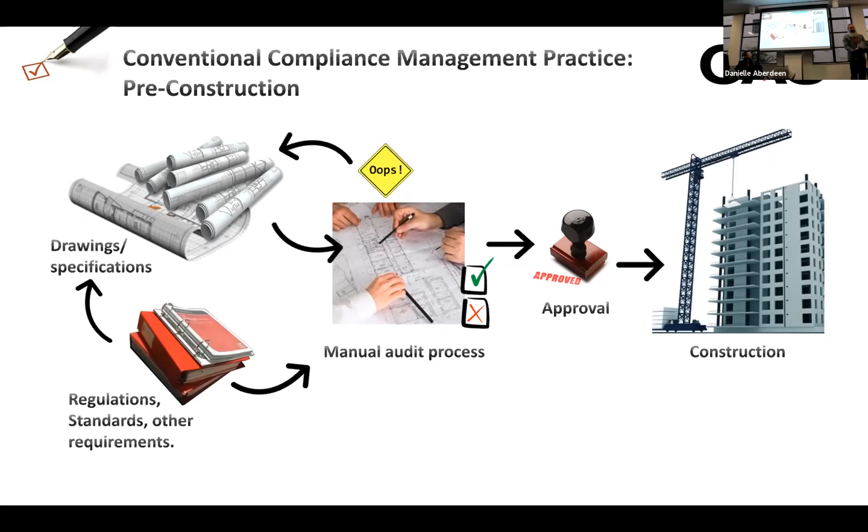And the approach that we have here is saying, well, what are computers good for? Computers are good for doing the simple, repetitive things that humans are really not very good for. Currently, they're not very good at doing the complex calculations and applying expert knowledge to do assessments. So can we have a partnership between the human experts and the computer to be able to more accurately and quickly check the codes and standards against the building designs which go in?

This checking happens not just at design, it happens all the way through the process. So as you're constructing, as you're looking at retrofit, as you're looking at demolition, there are compliance issues that impact on the building that have to be checked, that have to be ascertained. And as Johannes will show, the solution that we're developing will check compliance against the building at all stages of the life cycle. We'll focus more on the design aspects, but the ACABIM solution is there for all compliance checking across the life cycle of the building.

So some of the issues that we see and that we're facing. If we want to computerize this, well, we need regulations which are computerized. They don't exist. Our regulations are written for human interpretation and human understanding. And there's quite a difference between what we're capable of doing as humans and what computers are capable of doing. So if we want to be able to computerize any aspects of this, then the regulations have to be turned into a computable form. And there's quite a gap between the written version and a computerized version. So how we make that change happen and ensure that they're correct is an issue if we want to move into automated code checking.

I mentioned that the humans are doing very simple tasks often. A room like this, occupancy level over 30, does the door swing outwards? You have to check that for every single room in this building where the occupancy is great enough that the door should swing outwards. And so you have expert engineers who are going through the plans running these very simple checks, trying to identify every room which has a particular occupancy level, checking what type of door is there and which way the swing is on that door. And this is something that humans are likely to get wrong. They might not find every single room which has the right occupancy level looking through all of the paper designs. And so they may miss some of these things.

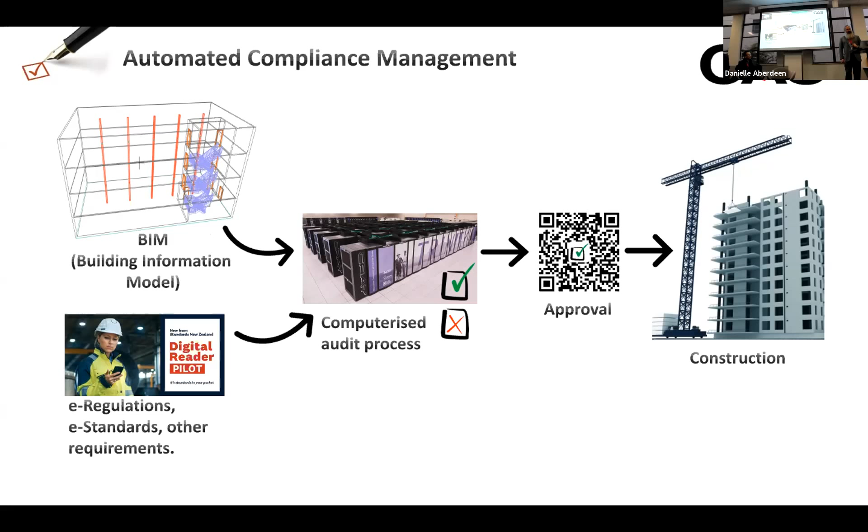So as I said, there's a lot that we need to make this really viable inside the country. So the 43 technical clauses from the building code, up to 500 normative references from standards, not just New Zealand ones, but ISO, ANSI, and the Australian standards, all which are referenced, that we need to be able to have access to be able to do some of the calculations that we're doing.

Working with the council, we've done a lot of work with the Christchurch City Council. They've identified 15 to 20 of the codes and standards which they think are their priority for doing the checks. The majority of checks that they do on a building come from these 15 to 20 codes and standards. And so we've been trying to match that in terms of making electronic versions of those particular codes and standards, that we can demonstrate where the benefit is in applying this approach.

Talking about the Standards New Zealand value add program. So this has been really useful for us that we can get access to these codes and standards. So the codes the MBIE has made available, and the standards, we have to be able to incorporate those into ACABIM. We've joined up with the value add program to get access to those particular standards, and so computerizing those to put them into the ACABIM system.

As I said, it takes a day a page. That's going to be millions of dollars worth of translation to try and get the New Zealand codes and standards into a computerized form. And we're sure that by the time we've done that, they'll change because they're always changing. And so once we've done our $6 million worth of work to translate everything into electronic form, we have to go back again and redo all of those codes and standards which have been updated in the meantime. Even the 15 that we've done now, 3 of them have changed since we've translated them. So we know this is going to be an ongoing process.

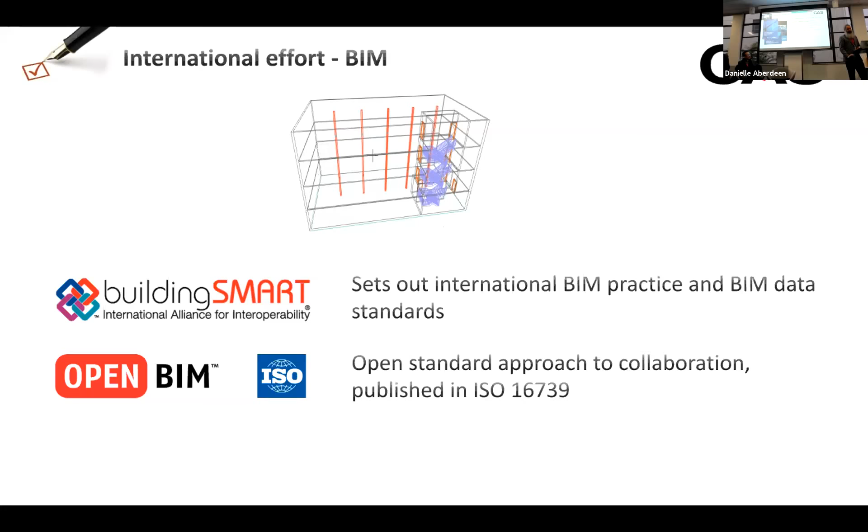And we know in New Zealand that this is now possible. Over 60% of projects in New Zealand are using BIM in some form. So BIM models are available for the majority of buildings being designed at this point in time.

And so the councils are starting to think about what they can do with these models, how they position themselves in the future so they can work smarter and faster with these models that might be available, rather than e-paper, which is what we're working on now.

Looking at the benefits, the BIM Acceleration Committee in New Zealand has identified a large number of benefits from BIM, and the uptake of BIM is accelerating over the years, an 8% increase year on year, which is pretty good. It's projected to be a $1 billion market in Australasia by 2024, so it's a pretty serious market developing around these BIM models.

As I said, for ACABIM we're talking human-guided automation. We know we can't do everything. It's performance-based codes in New Zealand, and the performance aspects are really hard for computers to work with. The acceptable solutions are much easier. Computers really like it when you tell them what to do exactly.

And we can transform much of the acceptable solutions into a computation. The performance-based aspects are harder - that's where we see the need for the experts.

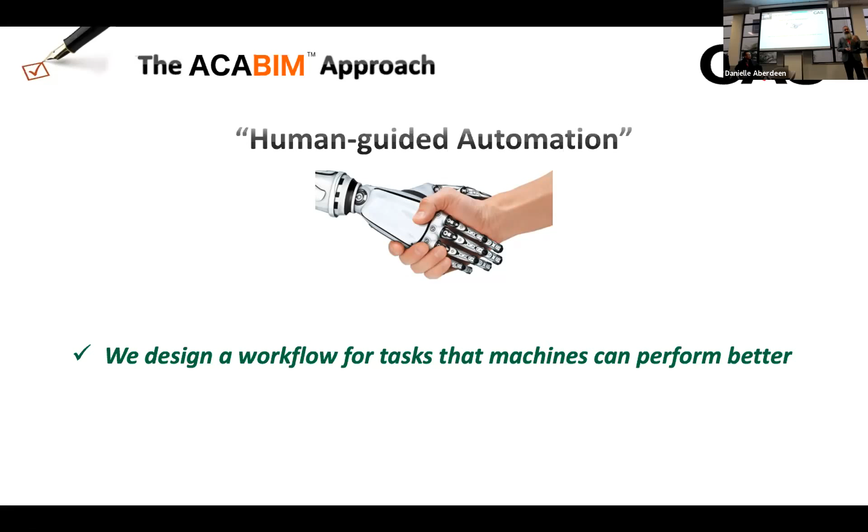So for the bits that computers can do best, we'll do that. For the bits humans can do best, we'll let the humans work on that.

As I said at the start, there's a whole range of processes where compliance is important, and ACABIM is looking right at that life cycle. As Johannes will show you in his demonstration, we have solutions which target many parts of this life cycle, doing audits against the needs of each of those different parts of the life cycle.

So we'll move very quickly into the demonstration that Johannes will give.

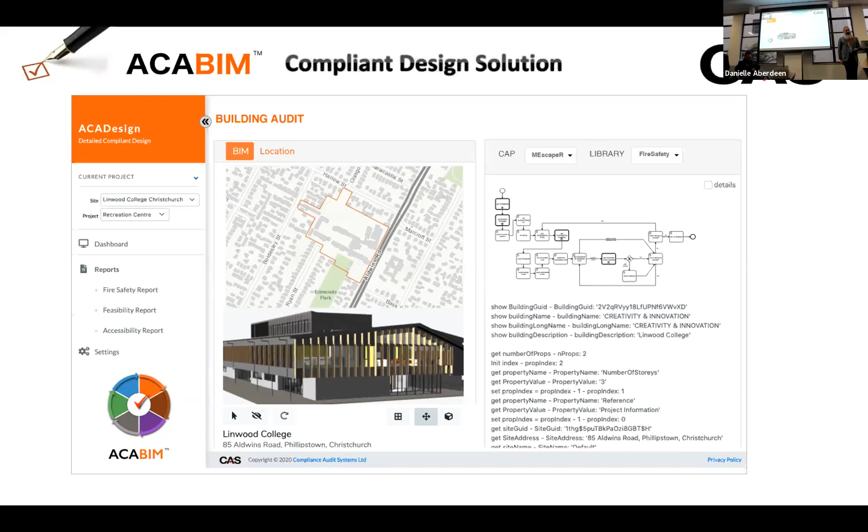So we can see large buildings, we can associate the land parcels for those buildings. This is the process equivalent of what the council would do to do a particular check against the code. This is pretty much the engine of ACABIM. So this process enactment, which takes the right bits of information from the BIM model, the right clauses from the regulations, puts those together and does the right calculations on them to give us a result which says how compliant it is. Working with Christchurch City Council, we've been able to show that we can generate reports very much the same as the reports that they would put out when they're doing code compliance checking for a building.

We find more things than they do. Computers are a little bit silly. If the tread riser is a millimetre off, it'll tell you it's a millimetre off, and a human expert wouldn't really worry about that. So we know, we're very exact. We have to build in a bit more human expertise into the assessment that we're making, so that we allow some of the things that would normally be allowed by a human, even though by the standard it's not exactly correct. But we generate reports so that people can see where the issues are with the system.

So I'll hand back to Johannes and he can show you what it looks like. Thank you, Robert.

Right. So here's a sneak preview of ACABIM. It has 6 solutions for its phases of the project lifecycle: planning, design, construction, operation, the retrofit.

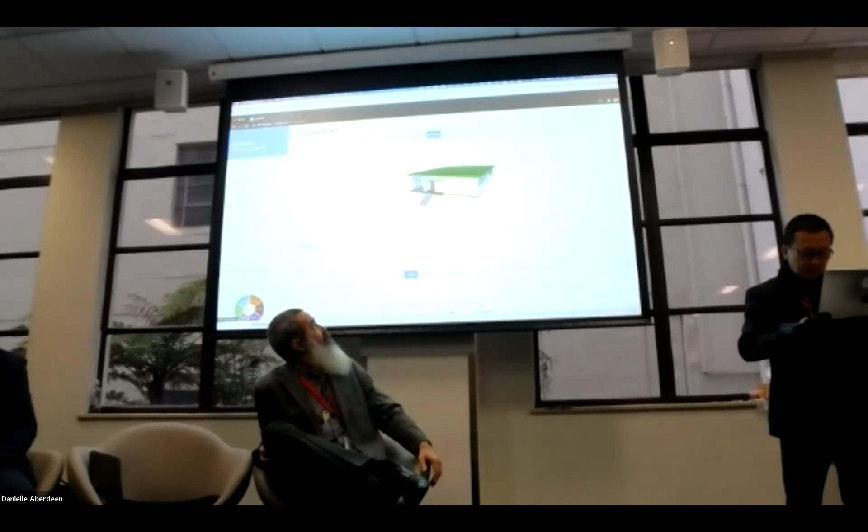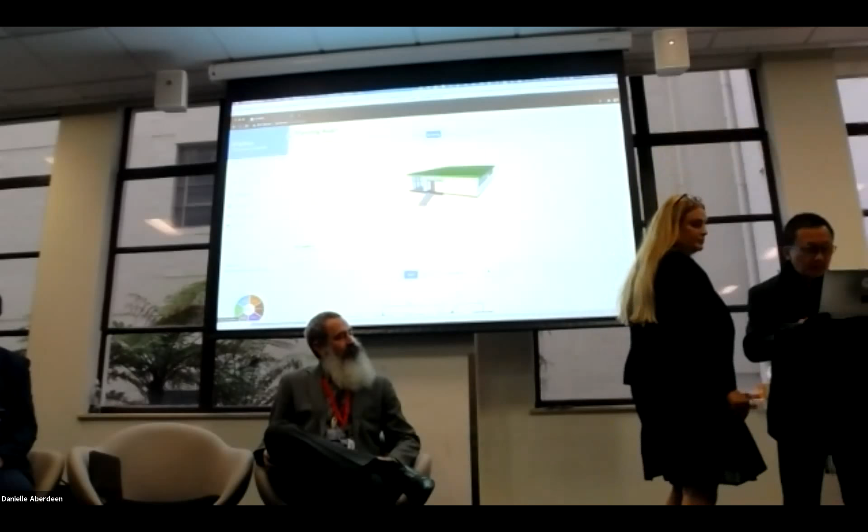Excuse me, sorry, could you just share your screen with the online audience? Right, sorry about that. Yeah, quickly do a quick recap. Yeah, I could go back. Cheers, another one. Let's start again, share screen. Okay, right. No, it's this one. Yeah. Oops, another one. Sorry about that. It's okay. Okay, yeah, perfect, all right.

So let's quickly recap. This is ACABIM, 6 solutions for different aspects of a project lifecycle: planning, design, construction, operation, and retrofit. Let's look at ACALand to start with.

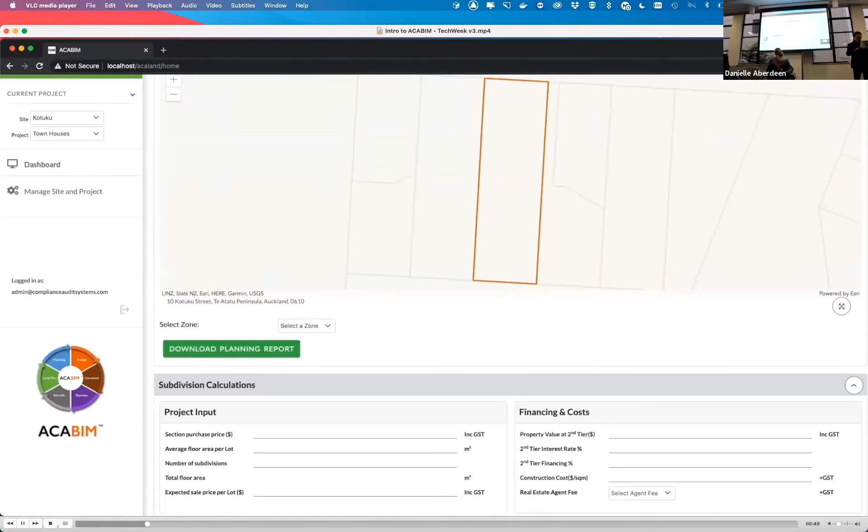Here you can select a site and a project, and you can look at the land information and property information that we draw from LINZ and other data sources. You can also query planning rules that have been pre-translated, depending on what you want to look at, in this case such as the maximum parking rate for this site. We can also look at optimizing your site development based on financial model as well as planning rules.

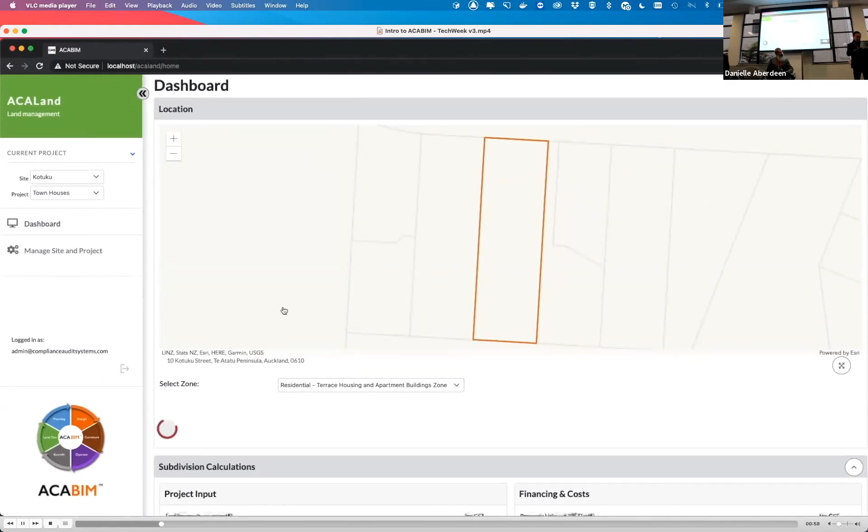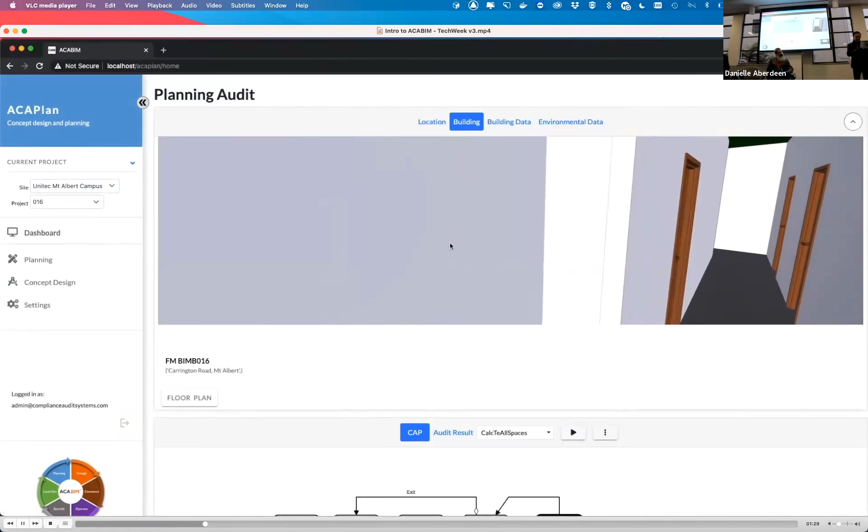Now, Land goes on to Plan, where you can assess your concept design for more planning compliance assessment. You can look at various aspects of the model and various information from the BIM model, the land parcel information, and also generate a planning report depending on the aspect of the checking.

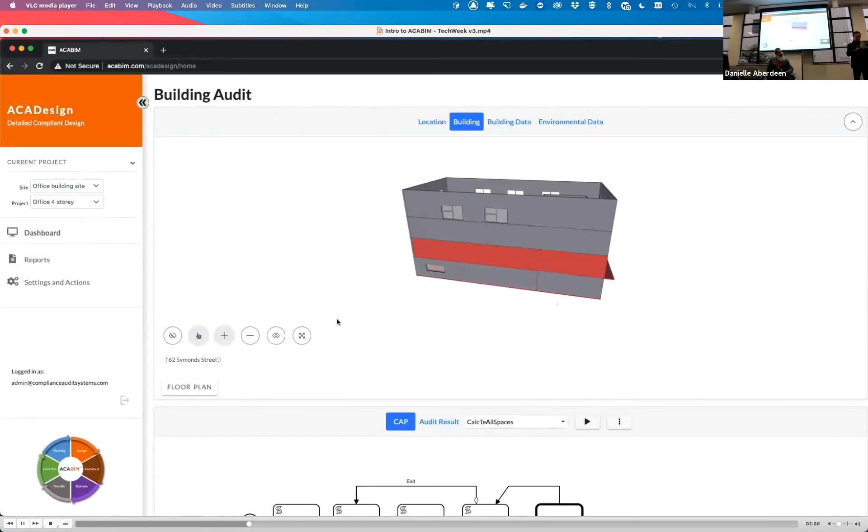From Plan, we move on to Design, where you can select a BIM model and do more advanced compliance checking and computations. I'll come back to Design later on to show you a bit more on how we audit the building for compliance with digital standards and regulations.

So this is just to show you how we can. If a building, let's say this particular model, has been approved for building consent, we can simply approve it for construction. That moves that project to Cons, which is the next phase in your life cycle. Simply click on proceed and it will go to Cons.

So in Cons, you have access to that same model that has been moved from pre-construction to construction. You can see there, work orders assigned to robots - that's when Minas will show you how that will happen. And from Cons, there's a quality assurance process you can go through. This is the human input side of ACABIM, also generated by workflow that can easily be customized.

This example is a pre-line inspection. They can go through each one and customize to suit your project needs. There's a lot of work still to be done, but this is a good start. And we can also move this project to handover to operation by moving the phase to FM.

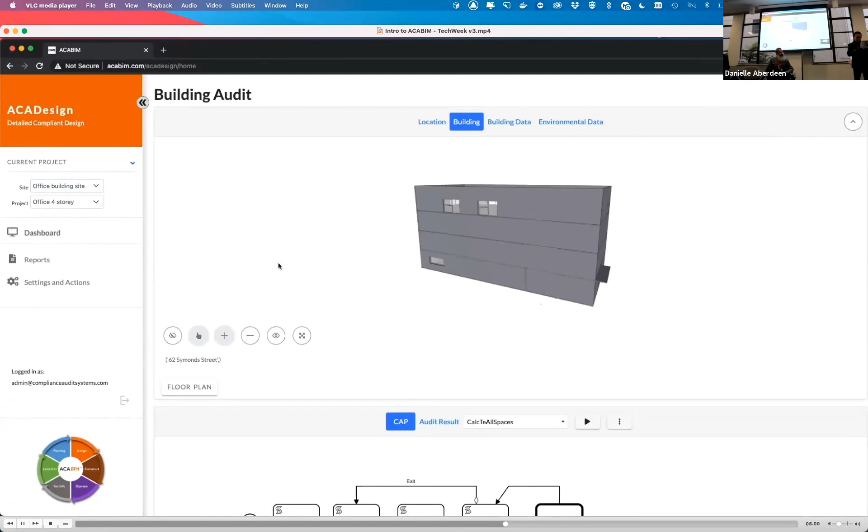So now let's look at ACADesign, where I'll show you how a building is actually audited. Let's select an office building, which is a 4-story building, and run through a workflow. So there's a building model. Let's pick it so we can look at the building model and the building information from the model. We query the spaces, the walls - this is all the information contained in the model.

Now let's pick a workflow - it's on the way. We just check doors of spaces. As you can see, there's a violation. This is querying the C/AS2 document to make sure doors are swinging in the right direction depending on the occupant load of its space, as Robert briefly described earlier. So basically taking criteria from that document and checking occupant density depending on the activities of the space, and calculating or estimating the potential occupant load of the space.

In this case, it's space 308. There's 148 people, and door count violated, door opening direction violated, because it requires 2 doors and only 1 is provided, right? So we can look at the building plan and have a look and see what's going on there. You go to the floor plan generated from the building model, go to that space, and as you can see, the door actually opens inwards.

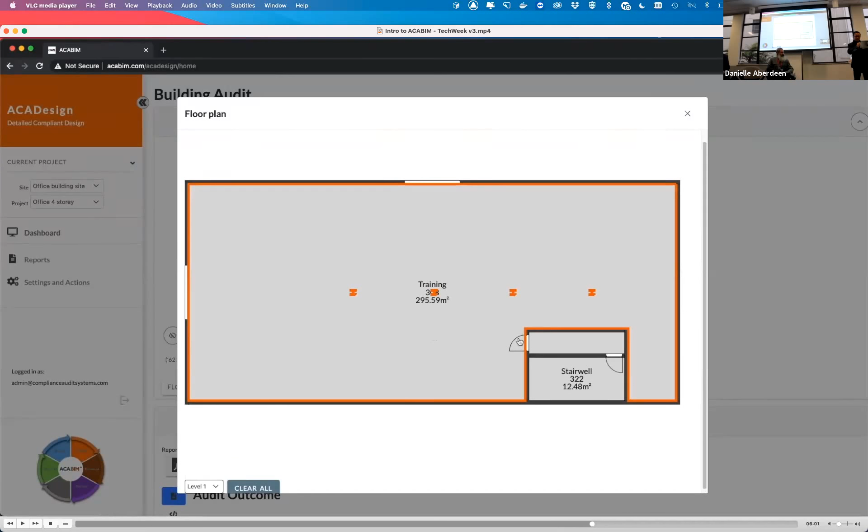Now let's - you can also generate a report of the execution result. As you can see, a lot of calculation happens behind the scene, with just such a simple result. So you can produce a detailed report of the execution.

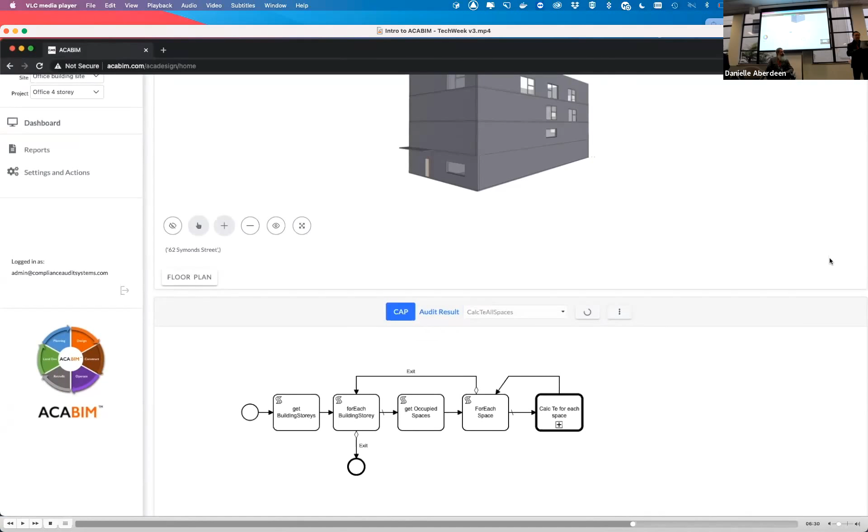And let's pick another one. Let's look at a calculation process based on the C/VM2 verification method, a calculation method to determine how long it takes for fire to break out of every room. This is very computationally intensive - fire engineers have to do this on a daily basis. If you have hundreds of rooms, it probably takes quite a long time, but people can just quickly run through that process and get a result, just like that.

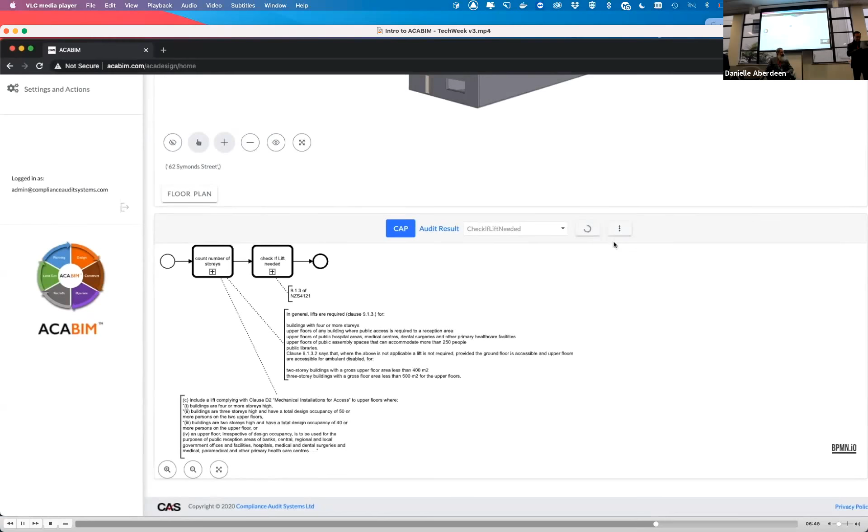So another one - what about checking if a lift is needed in this building? Let's run through the process. This is based on NZS 4121. There's a flow chart in NZS 4121 to guide you through the checks to see whether a lift is required. In this case, it says a lift is required because one of the criteria is satisfied - this building spans 4 stories.

What about natural ventilation to G4AS1? If this building was designed for natural ventilation, we want to know whether it complies based on the criteria of ratio of vent opening to floor area - in this case, 0.05. As you can see, there's 1 violation there as well, and we can also query to see what's going on there.

So obviously the ratio is less than the criteria. And we can send this data through to another system to integrate with another system if necessary. So the JSON data exchange is open standard. We can exchange with other systems for other purposes.

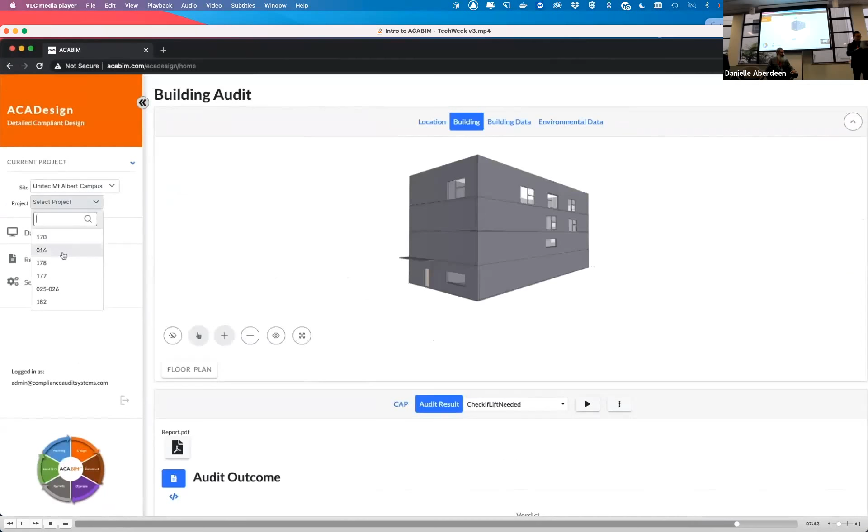And let's pick another building to look at and run through one of the checks as well, which is a simple one building with the mezzanine floor. And let's check if a lift is required in this building. So let's run through the same procedures. And the result is lift is not required.

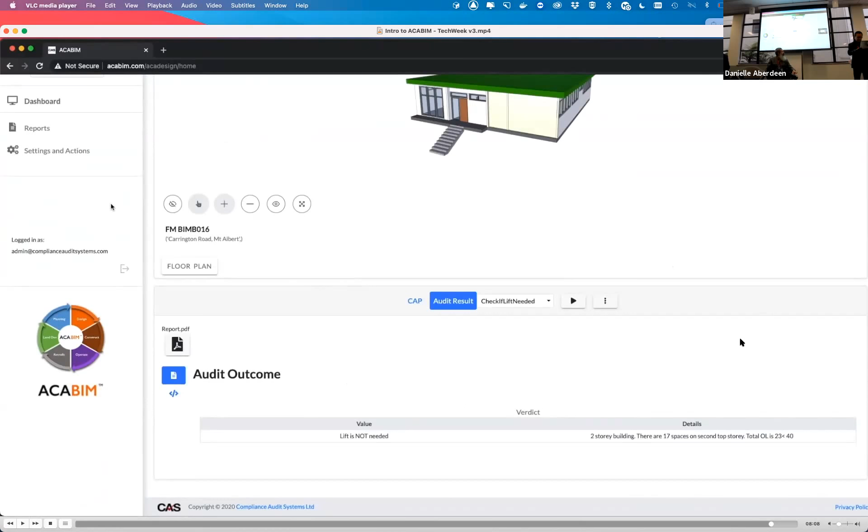Why is that? See here. It says there are 17 spaces on second top story. Total occupant load is 23, which is less than 40, which is the criteria. And that's it. So that's a quick sneak preview on how it works.

I'd like to invite Minas now to show you robotics. Yep. It is. Minas.

Screen share, it's still sharing? Still good? Excellent. Skip. The battery is almost run out. This. Yeah, okay. Yeah, need to be updated. Thank you.

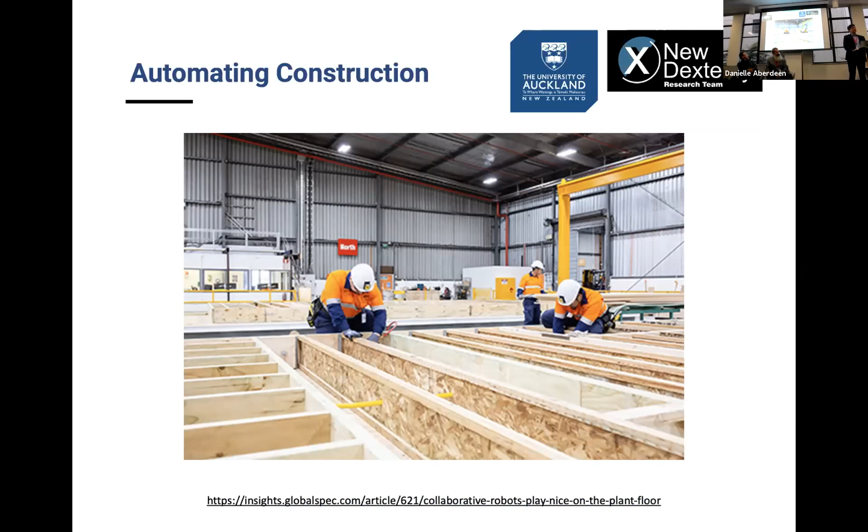What we want to achieve, we want to move from this image to this image. We want humans and robots working together. And by together, I don't mean that the human supervisor tells the robot what to do. No, we expect that they will work next to each other. Why? Because robots are not ready. A lot of people are talking about robots coming and taking the jobs of people. Robots are not ready. We need another 20 or 30 or 40 years to reach the dexterity of humans.

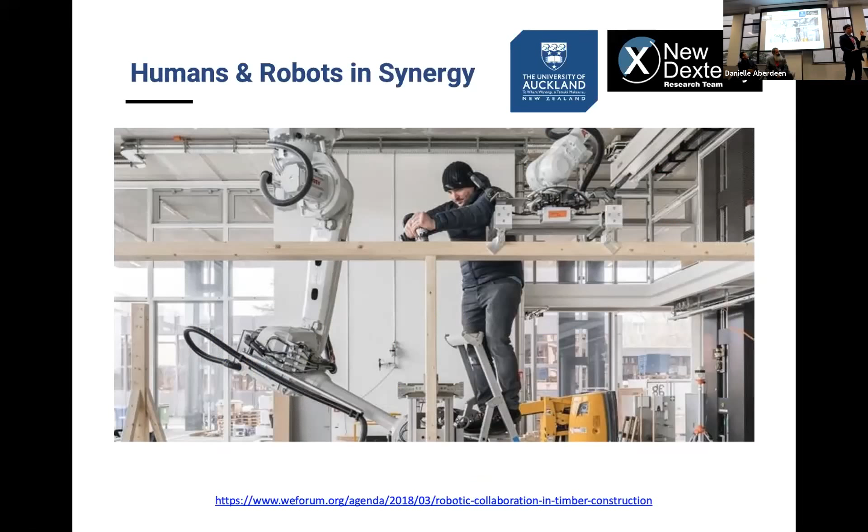And we plan to use robots not only off-site in prefabrication environments, but also on-site. And on-site, it makes a lot of sense for robots to handle dangerous materials, or to carry heavy loads, or to do things that are dangerous or boring for humans. So what we are trying to achieve, we want to improve job satisfaction of construction workers. We want to upskill construction workers. And we want to make construction workers and robots together more productive, and therefore New Zealand companies more productive.

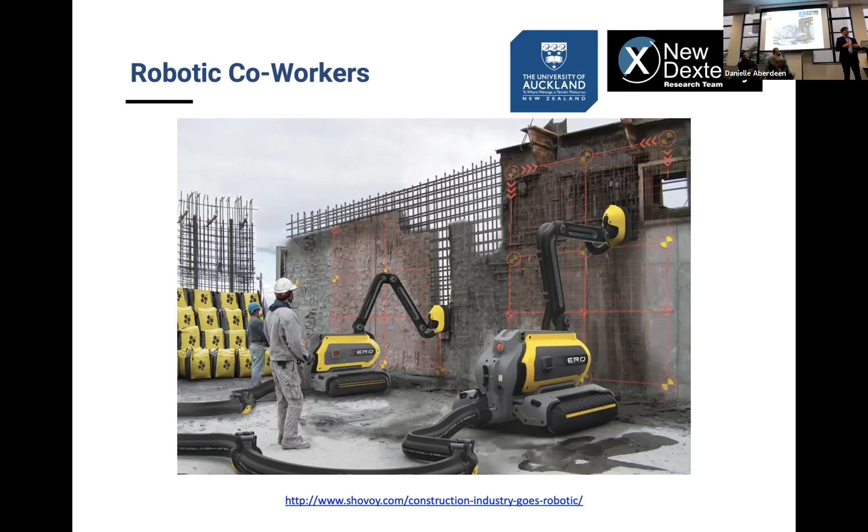This is how it will work with the CAS software. You see here that we have work orders that can be assigned to humans and work orders that will be assigned to robots. So you have a workforce of humans and robots working together. And if we go to the work request of robots, you see here the building, the site, the floor, the type of work, and the assignments. And you can really explain to the robot what needs to be done. 5 o'clock you leave, the robot takes over. And the next morning, a lot of things have been accomplished.

Now, you get the idea of what we are trying to do. Let's talk a little bit about the technical solutions, about the engineering solutions. First of all, we need to develop new robot hardware that doesn't exist. This is an example of a robotic hand that we developed in the University of Auckland. This is fully fabricated in New Zealand, and we can use it for AROA.

AROA stands for Autonomous Robotic Assistant. In Maori, AROA means perception. And AROA is expected to be a platform that will provide a lot of derivative platforms for the different tasks of the construction industry. So AROA is the superset. AROA is the dexterous platform. And from AROA, we can derive a lot of simplified versions of AROA.

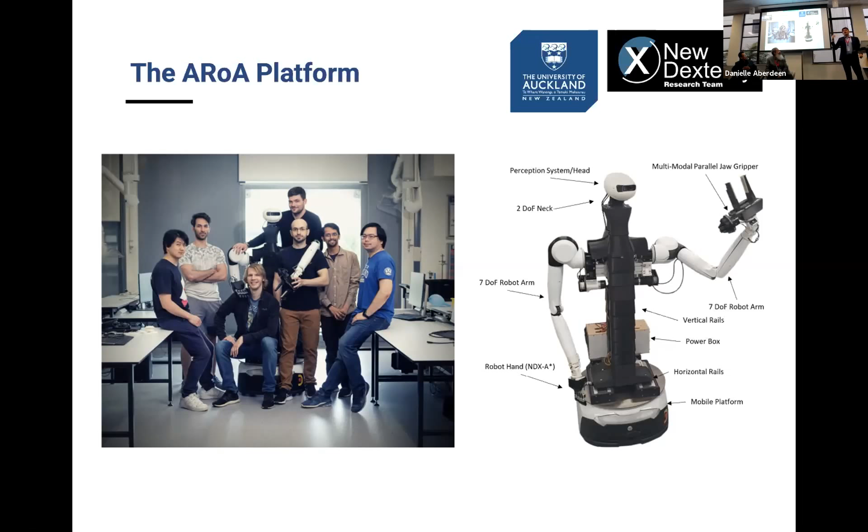Here you see my team and me together next to AROA. AROA is taller than me, 270 kilos, and it can carry 100 kilos of weight. It is equipped with this robot hand that you can see. Let me give it to you in order for you to take a look. And also, it is equipped with special tooling. These special grippers and tools can allow for drilling, can allow for assembly, can allow for installation of insulation or of cladding.

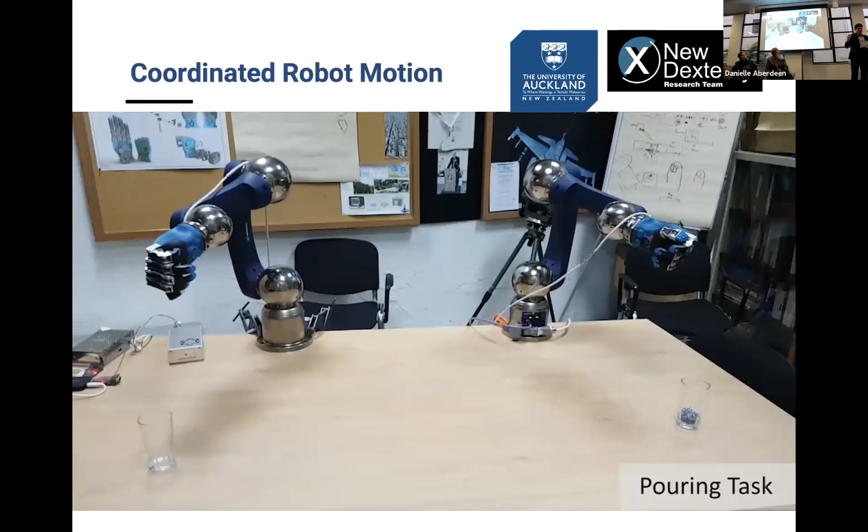And here you see how the coordinated robot motion looks like. In this video, we use two of these hands that you can see here today. Or we can also use them for construction tasks like drilling.

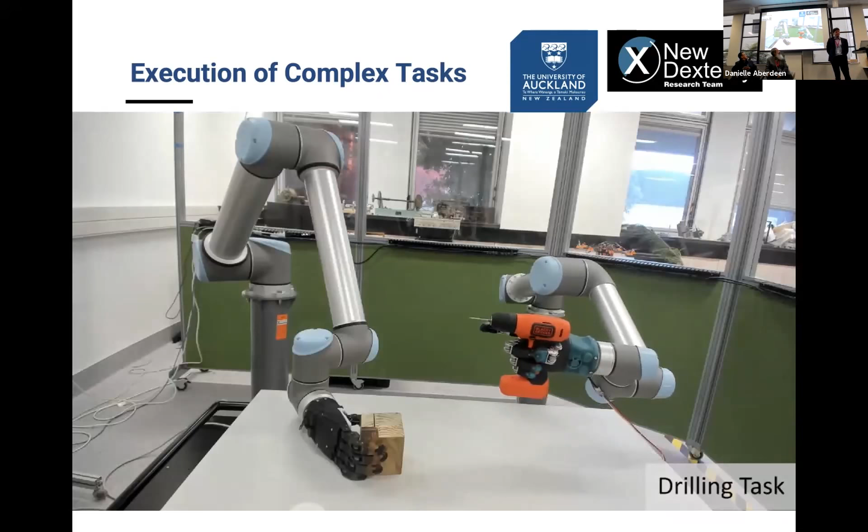The other important part of our work, once we have developed the hardware, is to create new human-robot collaboration frameworks. And in this domain, we need to make sure that the robot motion will be predictable. We don't want the robot to move in an arbitrary manner because it may hurt people. So we need to guarantee that all the control and path planning schemes that we will use will be safe for interactions with humans. And we want to make sure that all robot motions, or all robot plans, are predictable.

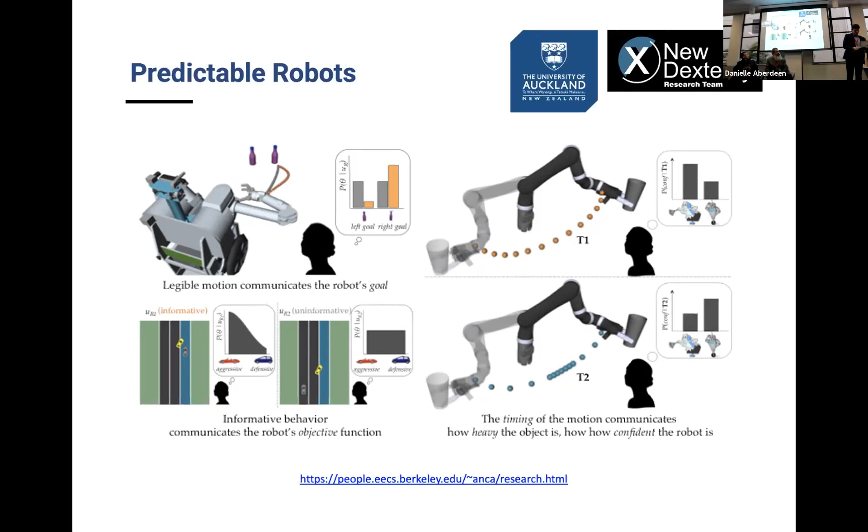We use augmented reality. Why do we use augmented reality? Because AROA is equipped with a lot of cameras. As AROA moves within a room, it reconstructs the environment. It creates a digital twin of the construction site. And the digital twin of the construction site updates the model in the software of CAS. Now, the human can enter the model with augmented reality or virtual reality and can annotate the model.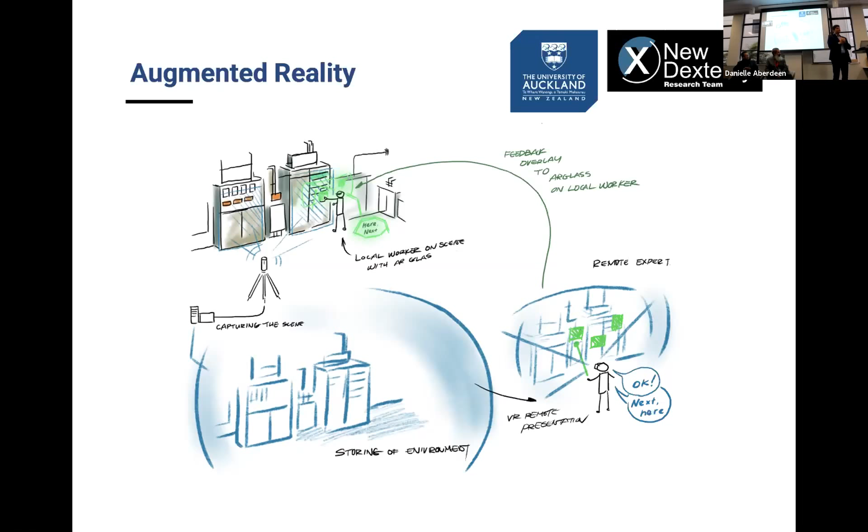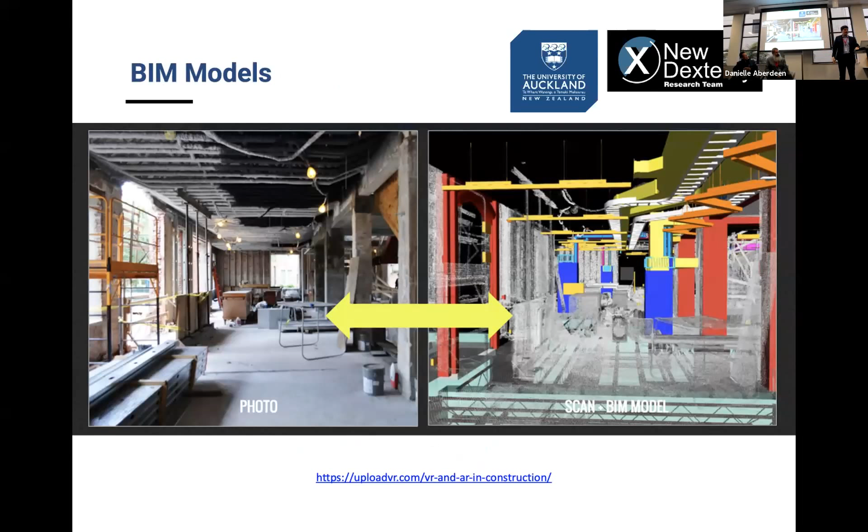And the fun part is the skill transfer. Because as we discussed, humans excel in executing complex tasks. Human workers may have 30 years of experience completing specific tasks. So what we plan to do is to ask human expert workers to teach the robots how to accomplish the tasks. So the robots watch humans and replicate.

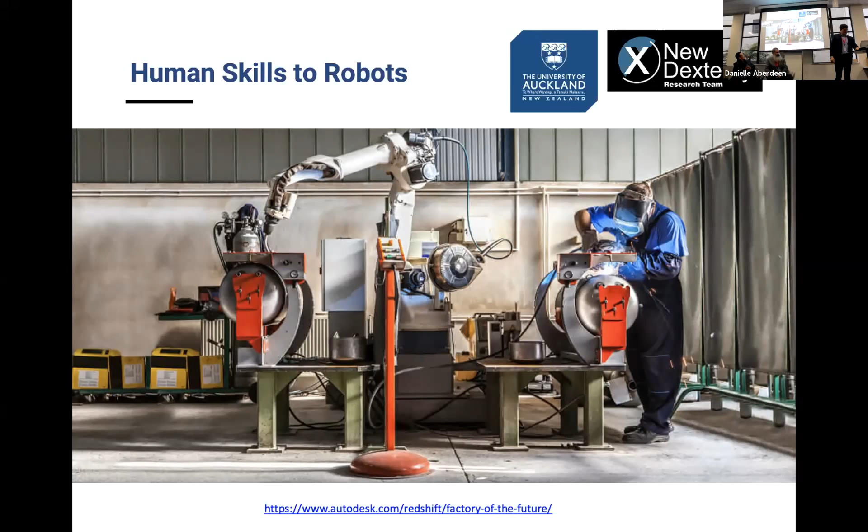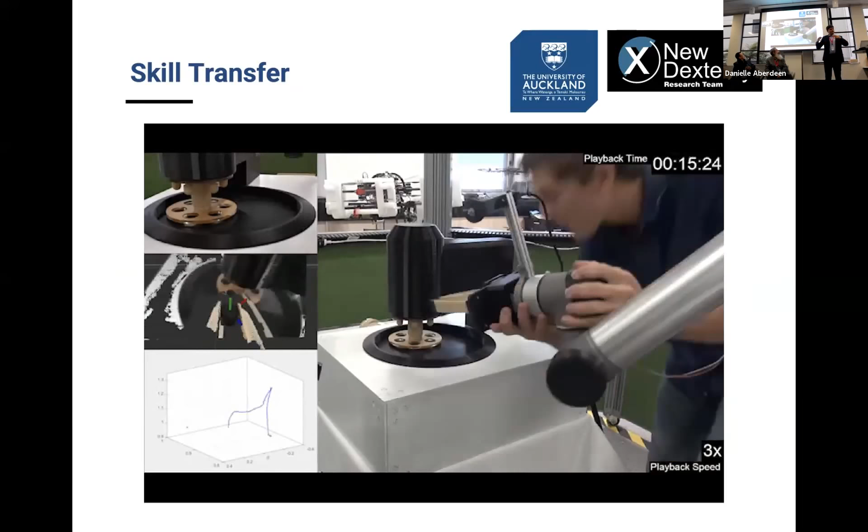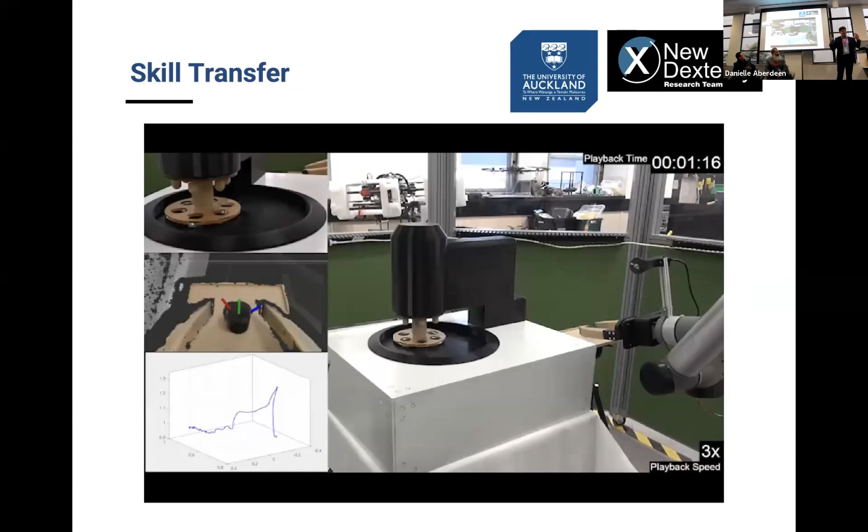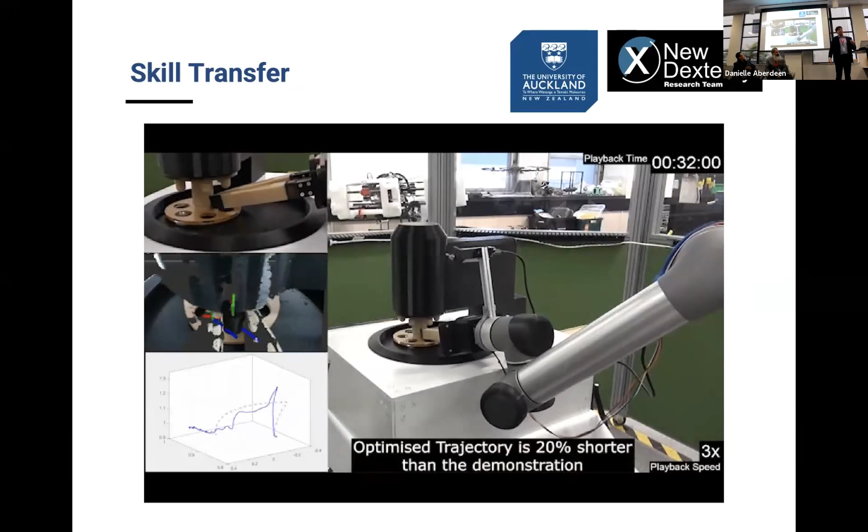And here is an example. The humans move the robots and teach the robots the task. We can do that with kinesthetic teaching. Kinesthetic teaching is when you grab the robot and you move it around in space. Then the robot, from the blue line that was taught by the human, creates the red line, which is optimized. So the robot takes the demonstration of the humans and optimizes it.

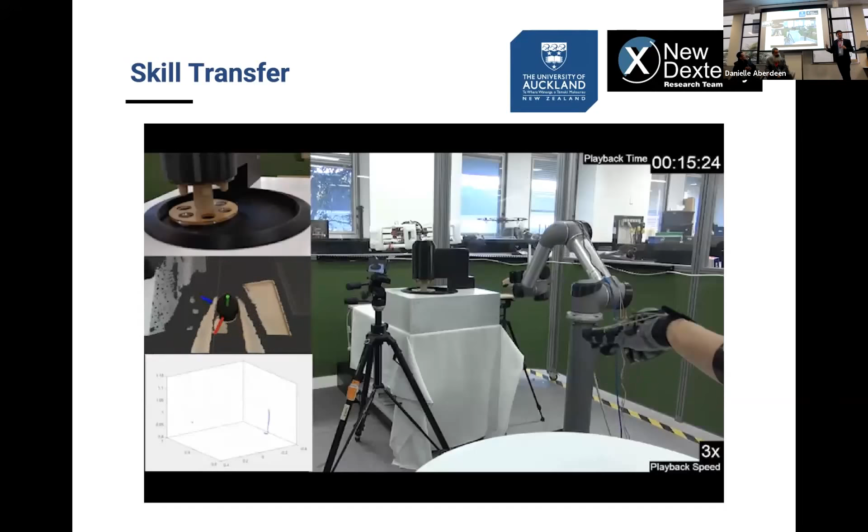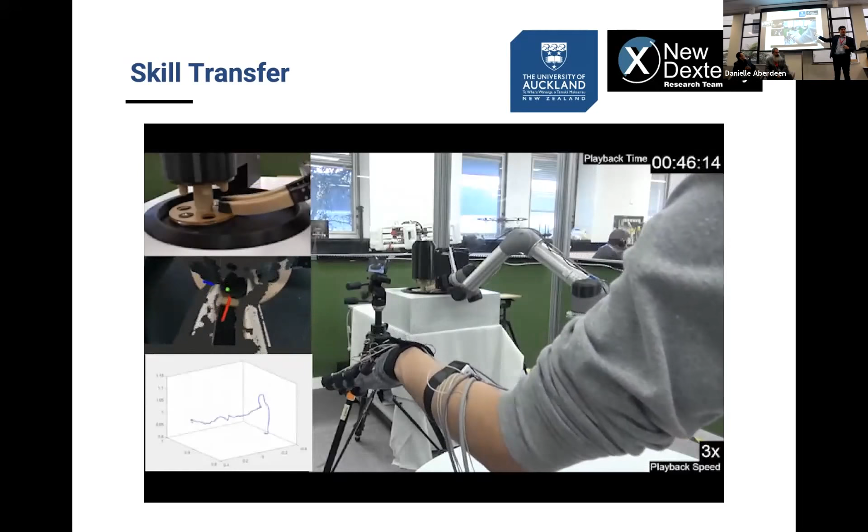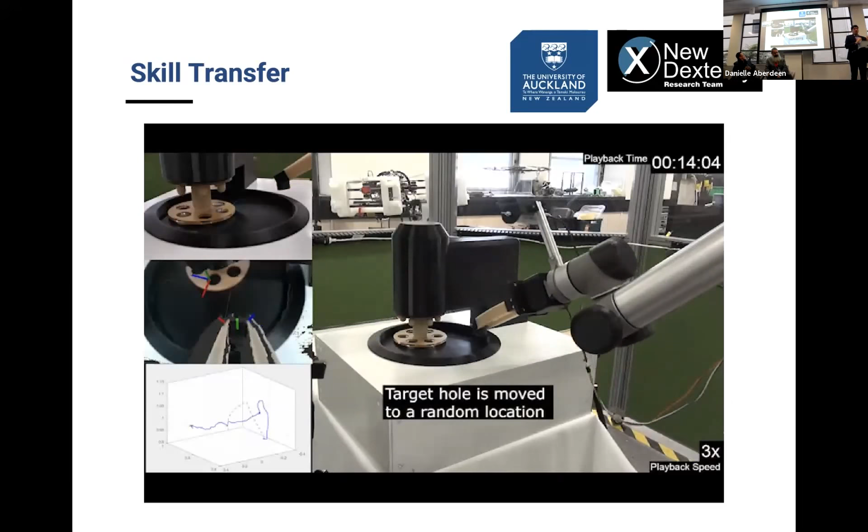Here we use another teaching example where we teleoperate the robot. We teleoperate the robot from a distance in order to execute a task. And we have the blue demonstration, the blue line. Then the robot takes over and optimizes the blue trajectory that was instructed by the humans so as to be faster, more efficient. And you can have, on average, 20% shorter trajectories and therefore increased productivity and increased speed.

We work with a lot of people from across New Zealand. Right now, we are discussing with teams from 8 different universities and research institutes. We have discussions with 13 companies that want to be involved in this line of work and 8 community partners. And we have created a research group; all of them together, all the academics, have published more than 2,000 publications, attracting more than 100,000 citations and 100 million in funding from New Zealand and overseas.

And we expect that this team in the future will be able to deliver impact in the following form. We want to increase New Zealand exports in the construction and manufacturing sector. In order to give some context, the industrial automation market is expected to be $280 billion by 2025. And all the robots that we want to build for construction can also be used for industrial automation. So the hardware is the same.

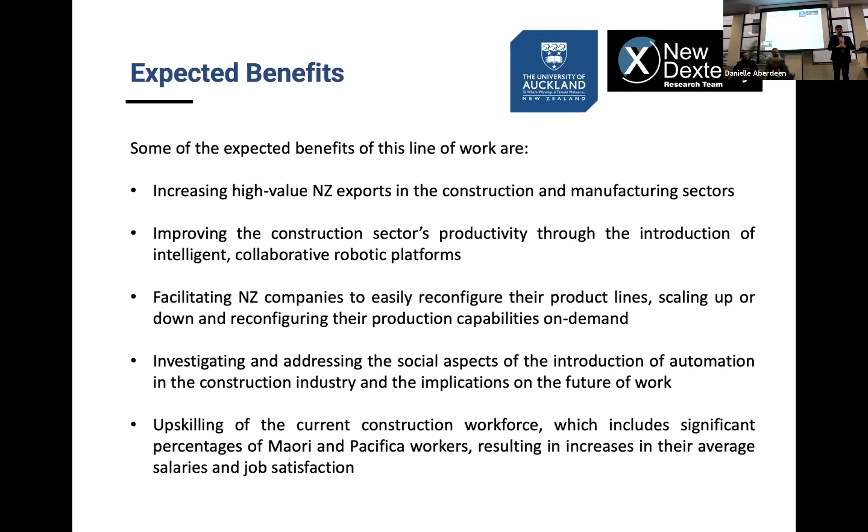Thank you, Johannes, Robert, Minas. I think I speak to everyone here. That's very, very interesting and really exciting about the potential that both these have, but then when you put them together, what it means for productivity, safety, job satisfaction, the social impact. Yeah, very, very exciting. So thank you for sharing it with us.